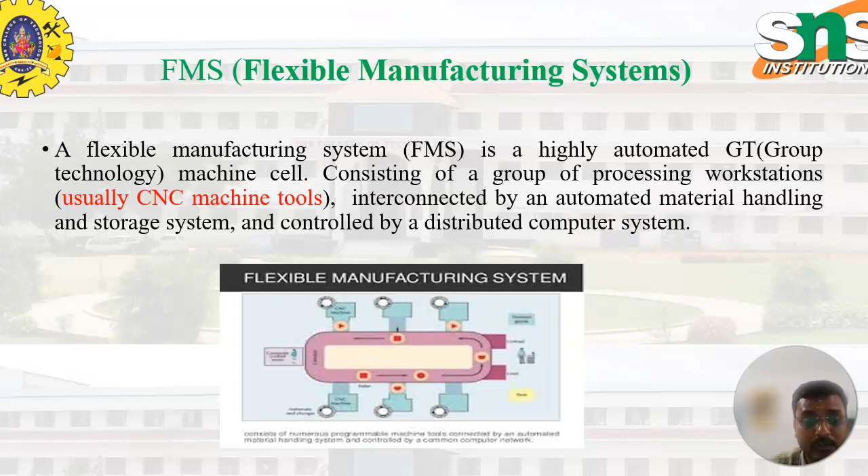Group technology is nothing but grouping similar parts or machining operations together to make the product. So here we have many types of advantages and many types of layouts. Some of the flexibilities in manufacturing are machine flexibility, production flexibility, mix flexibility and product flexibility.

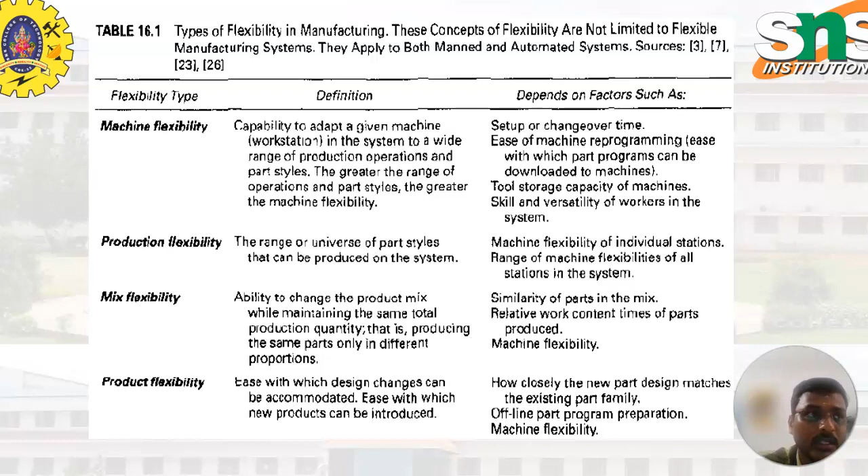Machine flexibility is the capability to adapt a given machine workstation in the system to a wide range of production operations. So we can connect n number of machines in a single layout, and we can give the component to be worked on that particular machine. Production flexibility is the range or number of part styles that can be produced on the system. They can do one operation and directly move to the next operation, then mix flexibility. These are some of the advantages.

Then routing flexibility, the capacity to produce parts through alternative workstation sequences in response to equipment breakdowns or tool failures. In case any machine breaks down or tools fail, we can directly move that particular work part to another machine to complete the process. Volume flexibility, the ability to economically produce parts in high and low total quantities of production given the fixed investment in the system.

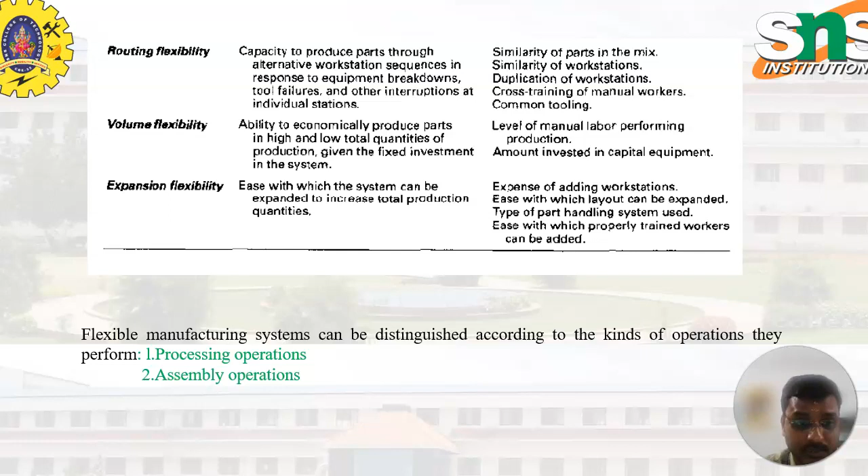Expansion flexibility is the ease with which the system can be expanded to increase total production quantities. FMS can have two kinds of operations: processing operations and assembly operations. Processing operations transform the work material from one state to another, moving towards the final desired part or product. It adds value by changing the geometry, properties or appearance of the starting materials. Processing means the main operations that give the shapes or properties of materials.

Assembly operations come after the processing operations are completed; after completing the product, we make an assembly. It involves joining two or more components to create a new entity, called an assembly or subassembly. Permanent joining processes include welding, brazing, soldering, adhesive bonding, rivets, press fitting, and expansion fits. These two are the main types in FMS. The processing and assembly operations help to make the product easily and with quality.

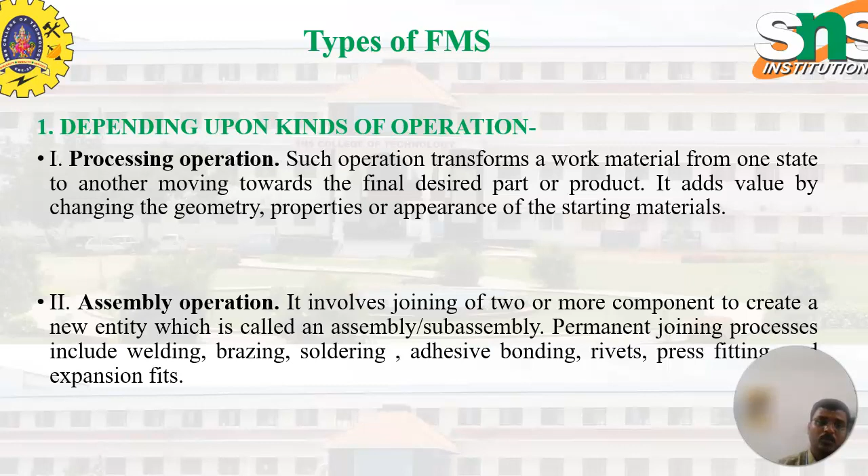These are the types of FMS. Depending upon the number of machines, we have three types: the single machine cell, SMC, the flexible manufacturing cell, FMC, and FMS. A single machine cell consists of a fully automated machine capable of unattended operation for a time period longer than one machine cycle. It is capable of processing different part styles. The FMC consists of two or three processing workstations and a part handling system, like a layout where processing is done continually.

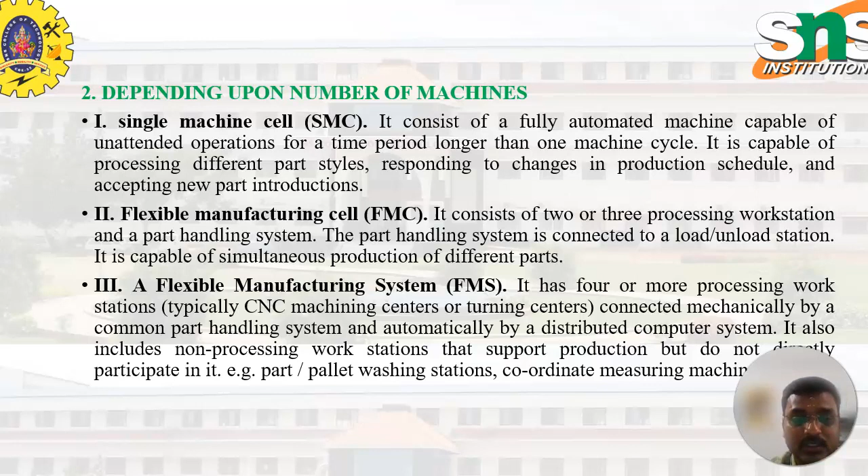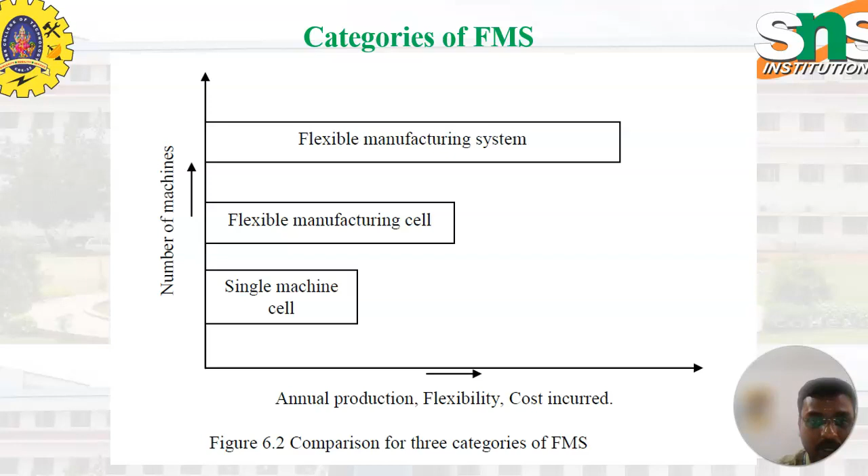FMS has four or more processing workstations, interconnected with CNC machining centers and turning centers to complete the process. These are the categories of FMS: single machine cell, flexible manufacturing cell, and FMS. Depending upon the level of flexibility, we have two types: dedicated FMS and random order FMS.

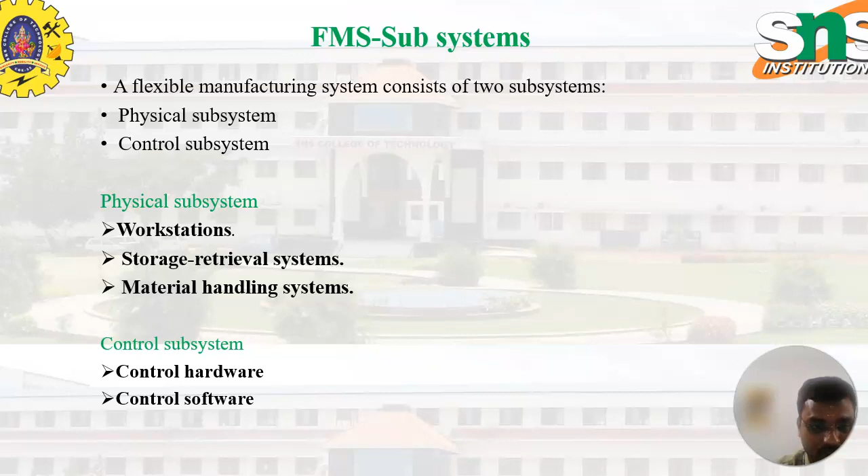This is about the flexible manufacturing system. We have two subsystems, the physical subsystem and the control subsystem. The physical subsystem is the workstations, storage and retrieval system, and material handling system. The control subsystem is the control hardware and software. This is the flexible manufacturing system introduction.